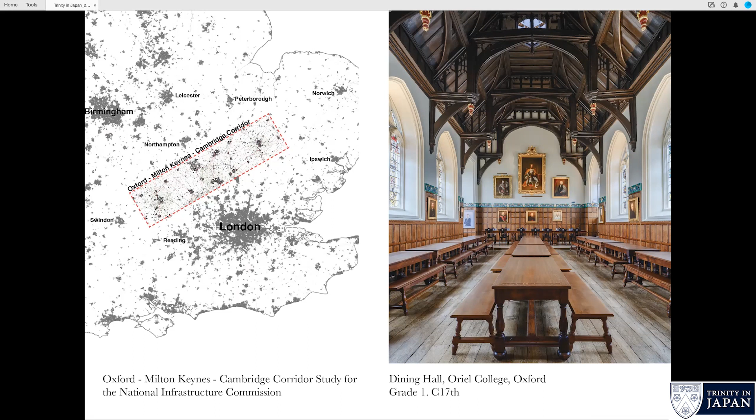The impetus for making existing buildings sustainable is simply this now hackneyed, well-familiar argument that buildings consume about 45% of our energy. 85% of today's buildings are going to be there in 2050, at which point we're going to be ostensibly at net zero - we've got a legal commitment in the UK to be there. All existing buildings are going to need a major retrofit in order to live within the amount of energy that's going to be available in a net zero 2050.

And such is the intensity of conservation concern in central Cambridge that it would be enormously difficult to get permission to knock one of those down and replace it with a modern building. So Trinity has very limited options for new build, and therefore needed to make the most sustainable use of their existing buildings. At the same time, they can't all become museums - they have to have an ongoing economic and viable use.

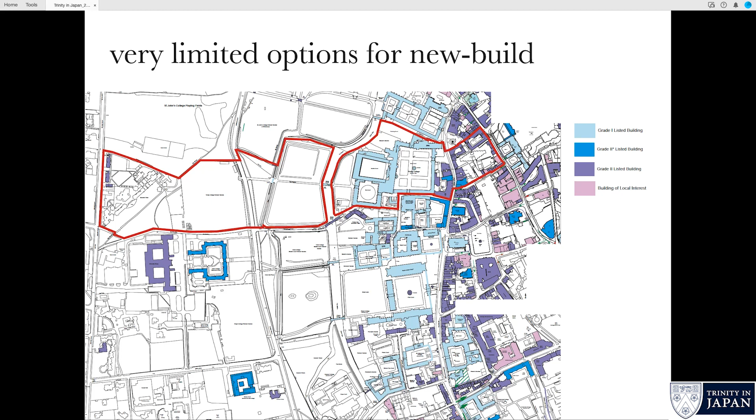A bit more context: the National Grid publishes future energy scenarios every 2 years. The first time these came out, I was looking at a figure that said there's 177 terawatt hours of energy available for housing, including residential buildings. There are four different scenarios - do nothing, and really ambitious. But you take 177 terawatt hours and divide it by the square meterage of all the houses and residential buildings in the UK, and you find a number that's not much bigger than the passive house level of energy use. So there is actually a supply side constraint on the energy available to our buildings in 2050.

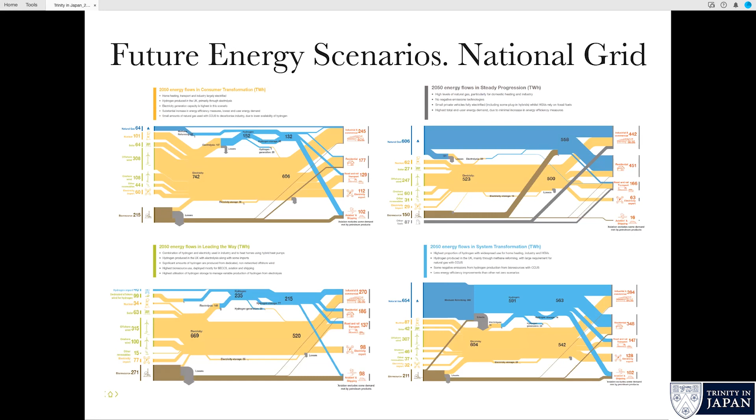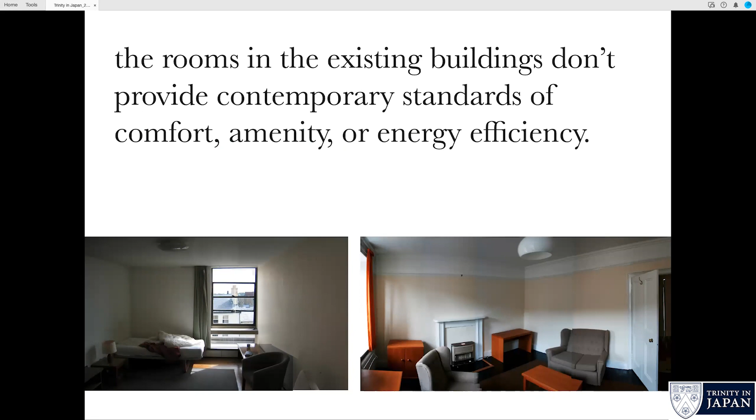There's a much longer calculation behind that, but I have published it and can send it if anyone's interested. The rooms in Trinity, whether in the Wolfson building on the left or New Court on the right, were no longer really providing contemporary standards of comfort and amenity, and certainly not of energy efficiency. So the bursar, Paul Simm, who was the junior bursar at the time, asked us to look at the Wolfson building. Sorry, I'm going to step back a bit.

The constraints on retrofit are listing and the approach of heritage agencies, the constraints on decanting whole populations of students from buildings while you retrofit them, the constraints of the college calendar and exam terms, and in Trinity's case, the fact that you suddenly discover you've got a whole of New Court occupied by builders, and you suddenly discover there's a royal visitor coming, and everything has to stop.

Absolutely everything cleared up - no contractors on site, the whole thing dressed up as if nothing was happening. And the final constraint is the lack of experience in the construction industry and the way in which we are not teaching people our building trades to work with historic materials and techniques.

Paul Simm, the junior bursar, asked us to look at the Wolfson building, built by Architects Co-Partnership in 1972. It was the first building I ever studied with my supervisor, David Roberts, in the first week of the first year. He said, 'What do you make of this then?'

It's a pretty classic brutalist building, with a kind of tectonic architecture of stacked and stepped blocks. It's pretty unyielding. That's the view on the left from Sidney Street, and on the right from the raised plinth, which sits on top of Sainsbury's at the Sidney Street end and Heffer's at the Trinity Street end.

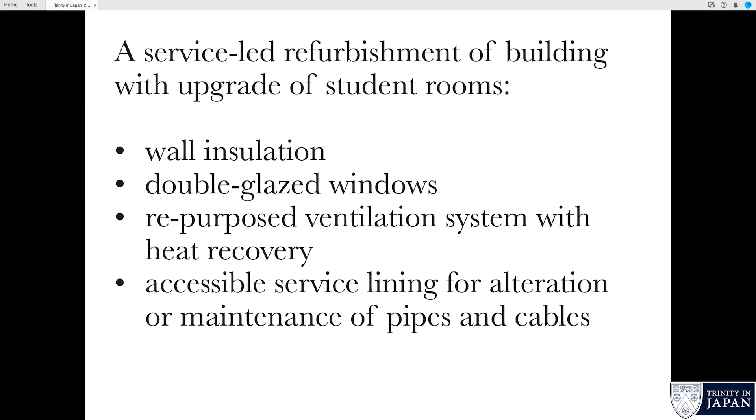We installed double glazed windows. We repurposed the original kitchen extract ventilation system to provide MVHR, to provide tempered fresh air to every room, and extract it through the gyps and the bathrooms and shower rooms and so on. And we built this accessible service lining for alteration or maintenance of pipes and cables and stuff.

And this is a completed room. We couldn't persuade the college to lift up the floor and put in underfloor heating, but we have got a much smaller radiator to adequately heat the room, and we've improved the insulation of the walls and windows. My understanding is students are very happy.

I tried to get the college to do some research. There's some research done at the Danish Technical Institute that says if you give people really good air quality, they perform much better, and there's evidence of that research done in schools. I asked Trinity whether they were prepared to look at the gradings first-year undergraduates achieved and whether it had changed after they moved into the building, but the college weren't prepared to do that, and probably quite rightly.

On the roof, we achieved a first in central Cambridge, which is covering the roof with photovoltaic cells. They deliver an output which matches the energy required to run the MVHR system, so those things are a kind of self-sustaining system without a major draw on the college's electricity supply.

Oliver, can I interrupt here at this point? By all means, yes, please, anyone interrupt. Sorry about this, Dennis sent a message here - he wanted to ask about the photovoltaics on top of King's College Chapel. What do you think about it? So I thought rather than waiting to the end, it would fit here, I think.

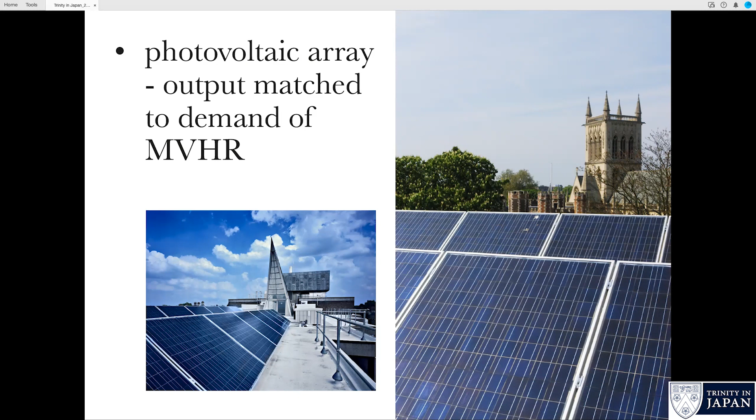So what we did internally, and I don't know how many of you remember the Wolfson building, but it was a pretty dark, foreboding interior. So we've replaced all the heavy glazing around the staircases and put in fire-rated clear glass, and the college insisted on a kind of colour coding of the floors, because that's the other aspect of that building, is you couldn't really work out where you were until you got to the top.

And then in the underbelly of that kind of stepped ziggurat form, we hung a couple of rooms, which were sort of free space, really. They increase the kind of social space component of the buildings, but they also form teaching rooms. Talking to teaching fellows there, they say, well, every other room in the college is a room with a wall and a window aperture in it. What's fantastic about the rooms, they're called the hanging rooms, is you're just there in the landscape. You're there in the architectural courtyard.

Some issues with glass floors, but I really like them, and I think people have learned to love them. So that's the view from the Garden of Eden, from Whewell's Court, with this crystalline glass room, and that's the view underneath it, with a flat black glass soffit. These were really just an extra, and to the college's enormous credit, when we came up with the idea, they just said, yeah, we love it, do it.

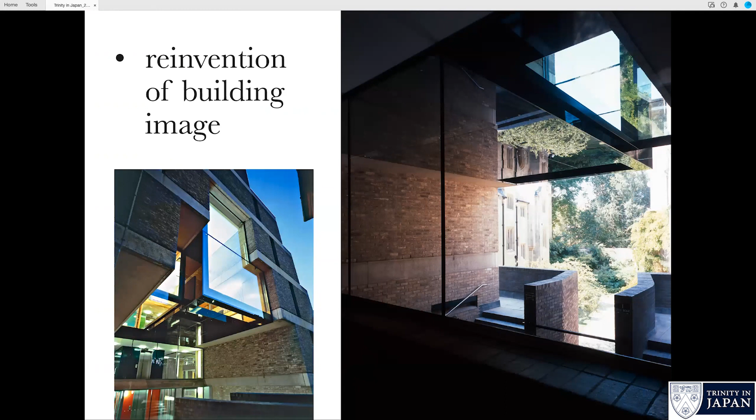So that's the view from Whewell's Court, and that's the view from Blue Boar Court at the back. Partly what these things do is reinvent the image of the building as well. So whilst you've upgraded the level of comfort and amenity in the building, at the same time you're giving the image a bit of a makeover, and I think making it more popular.

Moving on then to William Wilkins, 1822, New Court, commissioned when Wordsworth's brother, the poet Wordsworth's brother, was the master. Trinity was at that stage not a very wealthy college. It's rumoured that William Wilkins himself paid for the stonework on the river elevation - a precedent I was very keen not to follow.

He originally designed it as a Greco-Palladian building in response to the Wren Library next door, and then lost his nerve halfway through, or the college lost its nerve halfway through, and it was recast as a neo-Gothic building. When we took the plaster off the inside of the river elevation, we found the stones in place in the walls to form the much larger rectangular windows, so it's obviously a change that happened while it was on site.

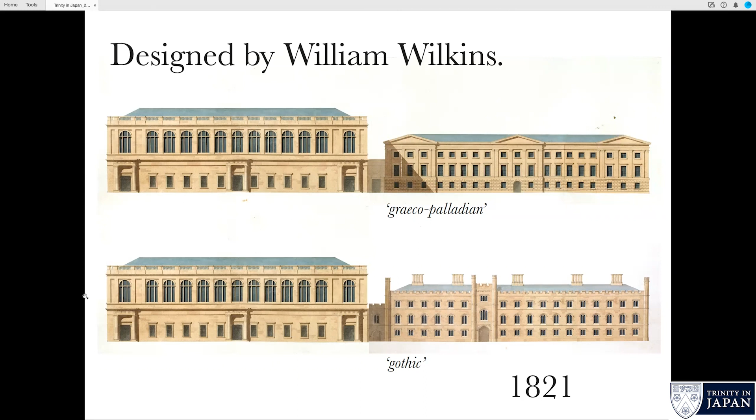The river elevation was clad in stone, but all of the other elevations, except for Garret Hostel Lane, were finished in a Roman render, which was then a relatively innovative material from one quarry in Kent. It's a natural render product, but its natural color is quite dark pinkish gray. So the building was finished with a lime wash, which was a lovely ochre color.

The other things to note are that originally the windows were leaded lights in metal frames. The window tracery is cast iron, and again that was quite innovative at the time. The chimney pots, some of which had already come down, were also cast iron in the original design. Everything was treated, as far as we can tell, in a kind of warm ochre color, and then the windows were just painted black.

But by 2010, when the college asked us to look at the building, the stone elevations were in pretty good shape, but some of the gutters and downpipes had split, so there were issues of leaking. In the 1970s, the building had been re-rendered in Portland cement render, and they had very carefully color matched it to the now bare Roman render. So the courtyard, when you all knew it, would have been this pretty dingy, dark grayish pink color.

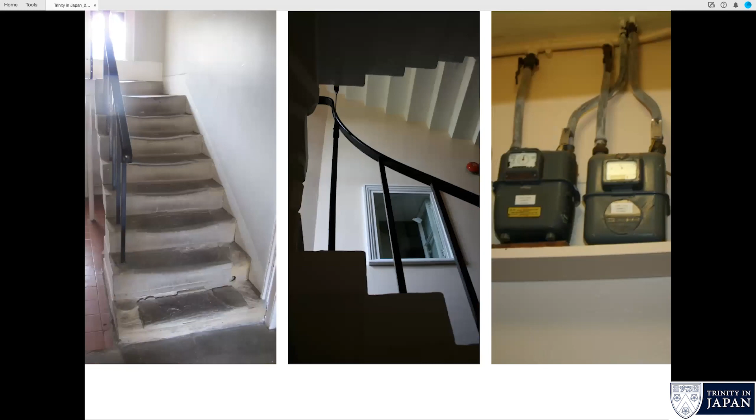The stone stairs, very heavily eroded, largely I think by bedders mopping rather than footfall. The kitchens opened directly onto the staircases with no fire separation, and there was still a fully operational gas installation through the building. As the college had iteratively responded to the needs for increased facilities and amenities, loos and kitchens and showers had basically been stuffed into every available corner and under every stair, on top of the stairs.

It was in a bit of a state, and the fire officers weren't very happy.

So the college brief was to create 21st century accommodation within the listed interiors, comply with all the building and fire and other regulations, provide complete new and adaptable service installations, renew the facades and the character of the court and the character of the rooms, and reduce energy use and carbon emissions in line with global targets, i.e. an eighth of where we started from.

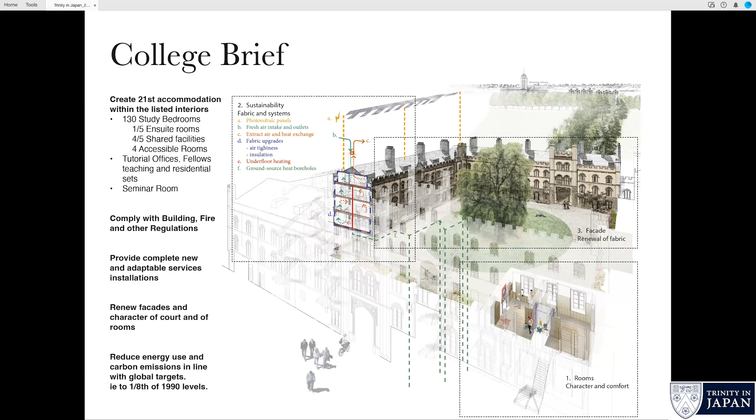At the early building committee meetings, there was a conversation about, should we just demolish it? Is it going to be possible? Should we just demolish it? And the answer is, well, how long do you want it to take? Because it might take 180 years to get planning consent.

The other option, which we proposed, was to retrofit it with a 3-stage reduction of emissions. And this has become a very simple mantra, but it really works, because if you say we're going to reduce energy use to 12.5% of what it was before, people go, oh, it's impossible, it's too big a jump, we can't do it.

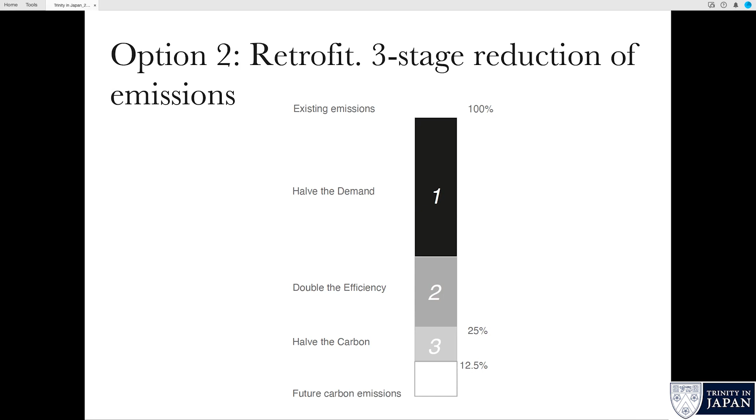So what we said was, we're going to halve the demand - halve the energy loss of the building by insulation and air tightness. We're going to double the efficiency of the plant, the ventilation, heating, lighting plant that meets that demand. And then we're going to halve the carbon in the energy supply to that plant by using renewable supplies. So that half and half gets you to an eighth, in more digestible steps.

So the holistic proposal we came up with, and this was before we'd been to talk to the planners or the conservation officers or Historic England, was: we're going to make the building airtight, we're going to insulate it including double or triple glazing, we're going to introduce mechanical ventilation with heat recovery, which is these dotted lines, and we're going to use the chimneys and the fireplaces as a way of delivering that ventilation, so you don't have ductwork passing through these listed interiors.

And we're going to reduce the energy loss to the point that we can use underfloor heating, low temperature underfloor heating, to heat the rooms, and that will be powered ultimately with a ground source heat pump array. And then we're going to put photovoltaics on the south-facing slopes of the roof.

Now, the underfloor heating's in. The college haven't yet installed the ground source heat pumps - I think that's a question of time and a degree of disruption fatigue. And the photovoltaics haven't yet gone on, but the consent is there.

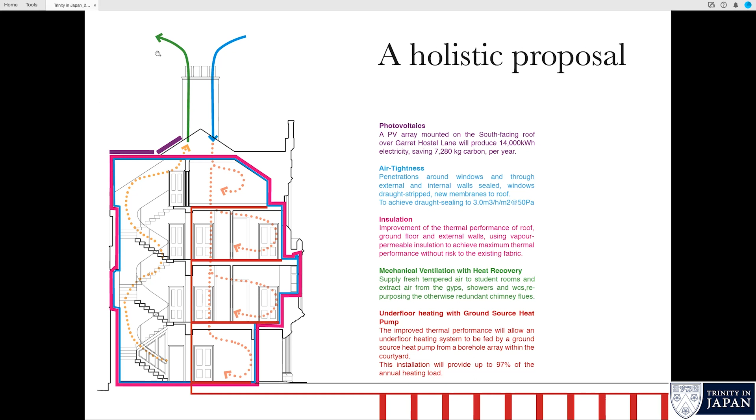So how we went about this, given that no one had ever done this level of intervention to a listed building, was to just sit down with the junior bursar and say, okay, so what are the risks we're facing? One is about fabric and insulating - we're obviously not going to insulate outside the listed elevations, we're going to insulate inside the building. There was a lot of myths about whether you could do that to a solid wall building or not. There was clearly a risk, and the college were very clear - they cared more about these risks than Historic England or the conservation officers.

The building was 180 years old. They wanted it to last for at least another 180 years, and they didn't want to do anything that was going to damage it, either its fabric or its character and its heritage significance. But the third real risk was the whole building consent process - how you get consent for something like this in the context of no one having done it before. So we did a lot of desktop review - this was the relevant research into retrofitting historic buildings and designing for future climate.

Some of it academic papers. There's a guy called Joseph Little in Dublin, writing some pretty horrific research on the growth of mold in internally insulated buildings. I think he overstated the case, and we had to do our own parallel research to show that it was wrong. And there was this amazing tool, which is still available online.

So as I said before, there were absolutely no precedents for this kind of work, but there were lots of myths. One of them, the primary one that Historic England and the conservation officer were saying, is well, you can't internally insulate solid walls. You just can't do it. It's too risky. You will get dry rot. So we set about understanding the fabric performance of the existing building.

There were six kinds of measurements we took: in situ U value, hygrothermal gradient monitoring, thermal imaging, air pressure testing. We built an on-site weather station, because there isn't one in Cambridge that works fully, but Trinity put one on the roof of the Wolfson building.

All of the international hygrothermal modeling tools are based on modern materials. And we say, look, this building was built 180 years ago on a shoestring. The bricks will have been cheap bricks, and they will have used the best bricks from each batch out of the kiln on the outside faces, and on the inside it will be any old rubbish and rubble. So that's not going to behave like a contemporary standard brick of known conformity of dimension and thermal and vapor transport properties. So we need to measure the actual building rather than rely on any of the online tools or assessment methods.

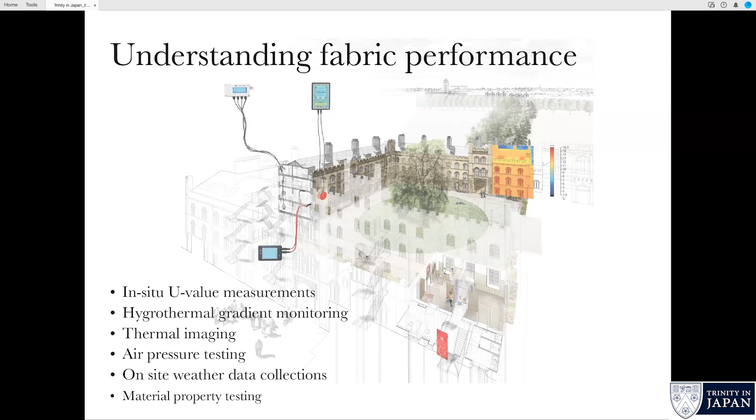So this is testing air tightness and thermal imaging. You can see radiators through walls on Garret Hostel Lane Bridge, such as the thermal performance of that wall. There were a lot of leaks.

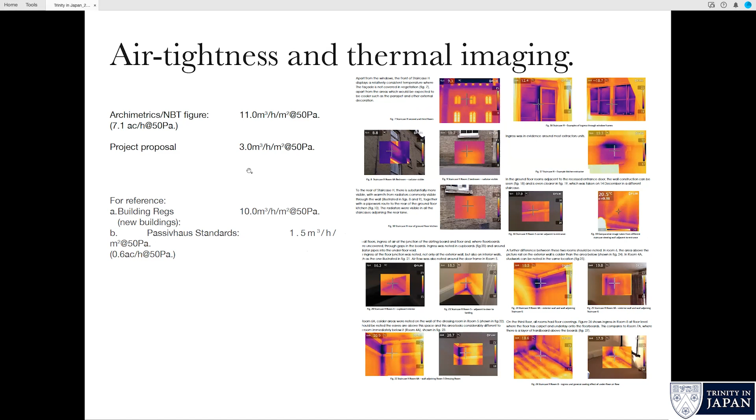The accepted wisdom was you'd have a figure of about 19 meter cubed per meter squared per hour at 50. We got 11, so it wasn't as bad as the SAP analysis or other things would predict. We wanted to get to 3, which was better than building regs, but not as good as Passive House.

The in situ U values were a really critical thing, because actually all those irregularities in the thickness of a wall add to its thermal performance. A standard U value calculation of a wall using BuildDesk or a proprietary tool suggested these walls would have a U value of about 0.94. What we actually measured was between 0.59 and 0.78, with an average of 0.69. So that's a 25% difference.

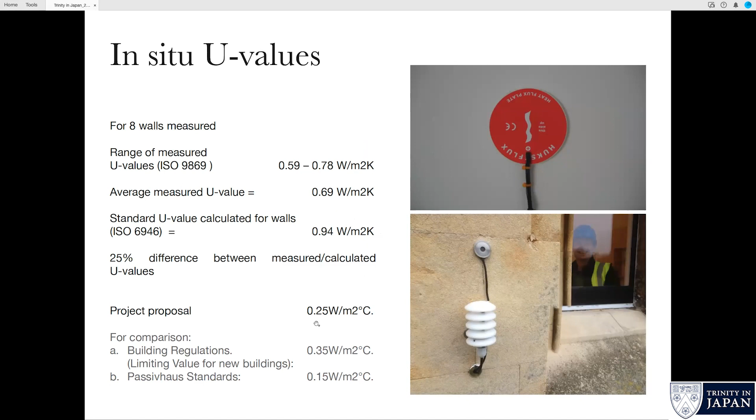What that does is save you from the risk of over insulating in order to reach a target, and therefore causing yourself problems of mold, condensation buildup and mold growth. So we aimed for about 0.25, which is better than building regs, but again, not as good as Passive House.

The interstitial hygrothermal monitoring - that's where you put probes in the wall at different depths, and you measure the temperature at the top, the humidity at the bottom, at various points through the wall. If those two lines cross, you get dew point, you get interstitial condensation. So the wall was working pretty well beforehand.

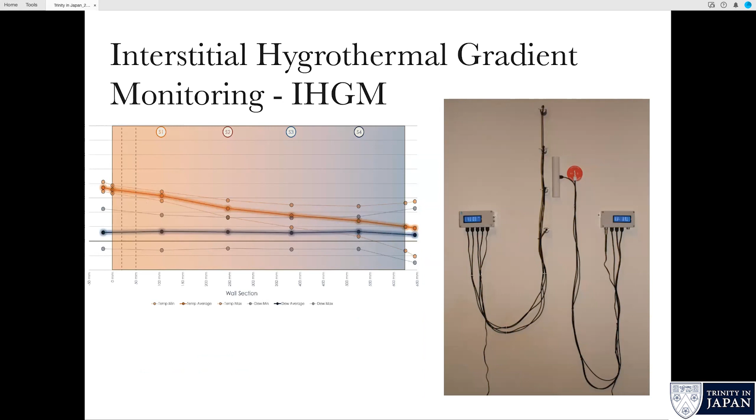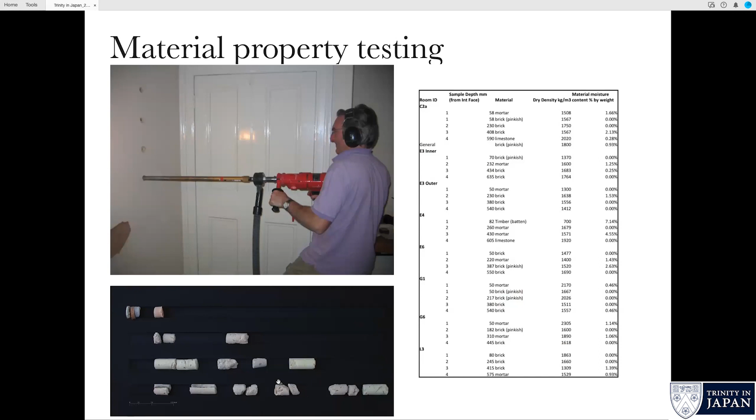It was quite an intrusive process, but what you find when you take a core sample out of the wall is there are lots of gaps, and those gaps actually help your thermal performance.

The Heritage Agency said, yeah, but look, you're just talking about models - what they don't mean anything. So the college decided they would build a sample wall of the insulation proposed. On the right in this room, I6, is a sample installation and a control installation, to see whether putting insulation on really was going to cause a breakdown of the fabric. We ran this for a year, and that's the control test - oh, the word July has dropped off my slide, sorry.

Basically what it shows is that in the insulation zone there is a steeper thermal gradient and a slightly steeper moisture gradient, but the lines don't cross at any point. The conditions in the wall outside the insulation are more stable than in the control situation. We still don't know yet whether that's a good thing, and only time will tell, but all of one's instincts are that stability is good for built fabric.

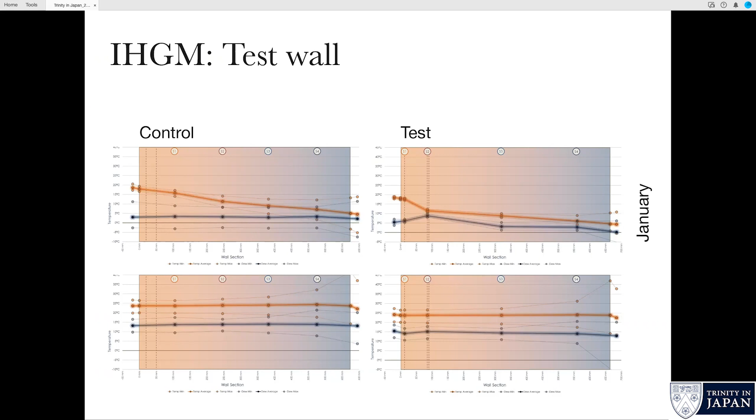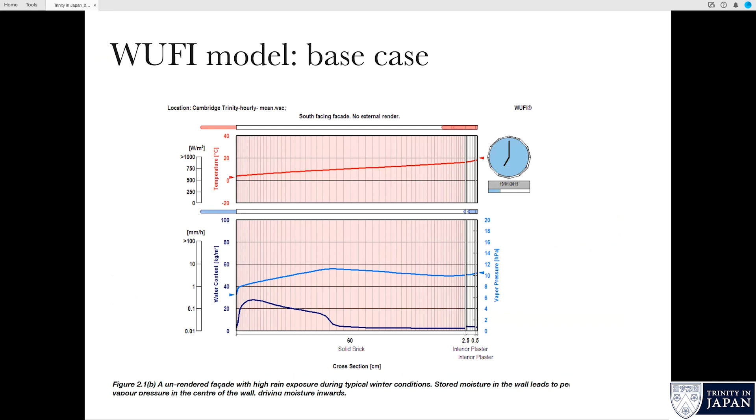The college set up a technical scrutiny committee of fellows, and all of this stuff had to be presented to them on a regular basis. They said, yeah, we agree with that research, we think that's a reasonable assumption to make, or a reasonable inference to draw from the data. That was brilliant, because having the college with us at every step made us feel much more confident, but it also fed back into the college's confidence in what we were proposing.

But I found this completely meaningless. Is 80% a good thing, or is 44% a good thing? Is it good enough? So we went back to basics and said, what is the risk we're talking about here? It's the risk that you create conditions for mold growth.

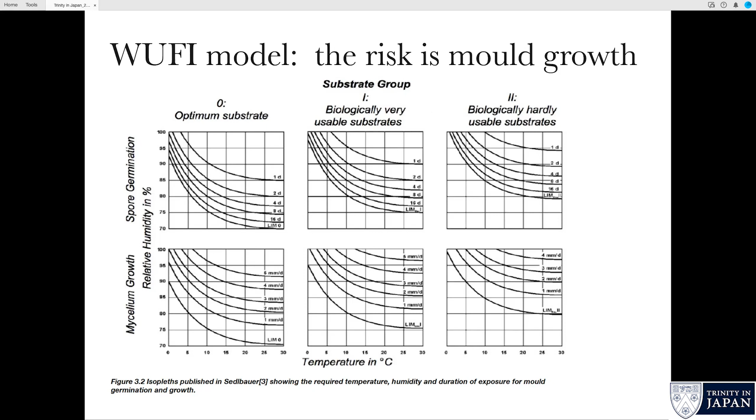So here are some isopleths of mold growth. On the left, optimum substrate, that's agar jelly - that's O-level biology, agar jelly, mold growing. Biologically very usable substrates, that's things like building paper and modern softwood. And on the right, hardly usable substrates, that's actually things like 180-year-old pitch pine floor joists, concrete, and brick.

We said, let's measure our risk, our output from our WUFI model, against that. So on the left-hand side here, if you did what the industry was saying we should do, which is to use a phenolic foam insulation with a vapor control layer, you find that over 30 years' worth of model conditions, you're growing a lot of mold.

On an exposed elevation, so that's a south-facing elevation, you're growing a lot of mold - where there's not much rainfall, and moisture is moving through the walls from the outside to the inside, as well as being generated by users, showers, kettles, and stuff internally.

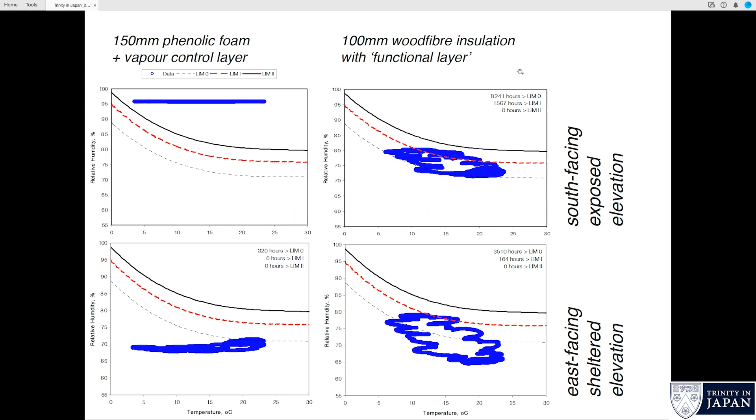So if you build a complete imperforate barrier, which is in itself almost impossible to do on site, you will have problems on some elevations and maybe not on others. If you use wood fiber insulation, which is vapor permeable, allowing moisture from the inside to move outside and vice versa, then you have a broader range of conditions, but as long as they don't cross that red line, you're probably going to be okay. It turned out 100 mil was too much for New Court, so we used 60. But I'll come on to that.

So another myth is, oh, if you're going to insulate inside a building, you've got to insulate the party walls that meet the outside wall, because they will be cold bridges. Well, we did a lot of thermal analysis, and we found that's rubbish. You create cool bridges, but they're not cold. And as long as those cool bridges are greater than about 13 degrees, you're not going to get condensation. These are the walls at New Court.

We were modeling the coldest point being 16.8 degrees.

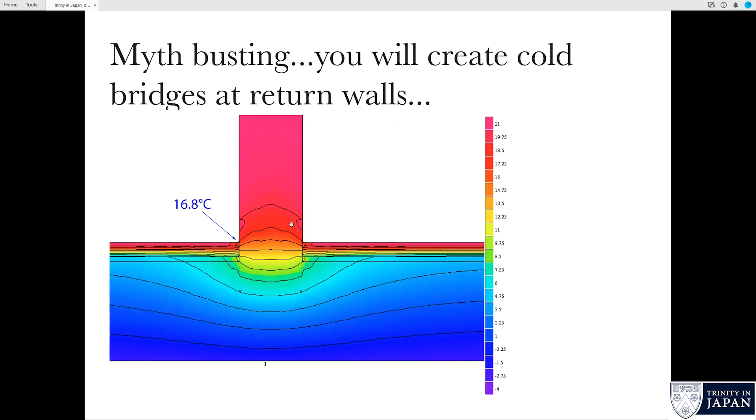So actually comfortable. And if you expose a cornice - the college again brilliantly said, we don't want to do that thing where you put insulation on the wall and you've taken the cornices off and put them back on the face of the insulation. We want to leave them where they are, and reveal them to show what we've done, to manifest that we've laid this panel of insulation onto these walls.

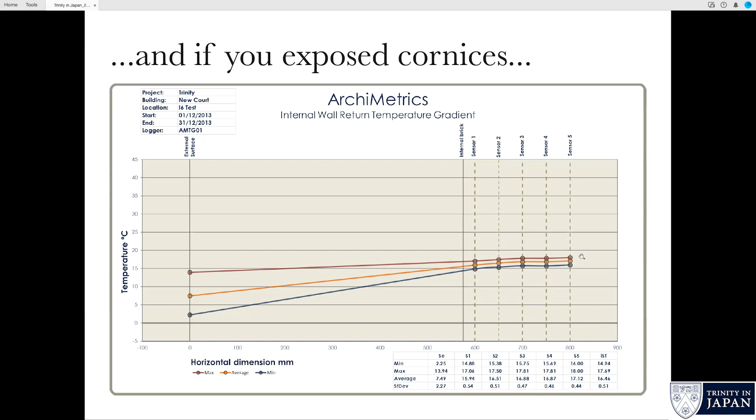That caused a huge kind of, oh, there'll be mold all over them. But actually, the predictive modeling showed that wasn't going to happen. This is actual monitoring on site, showing that there is no conditions for condensation on those existing cornices.

You must say if this is getting too technical, because I could go on about this for hours.

One of the other myths was that you can't put underfloor heating under old boards, that they will crack up and dish and cup. But actually these floorboards were 180 years old. They had already done all the shaking, moving, twisting, cupping and buckling they were going to do. So we lifted the floorboards, put in the underfloor heating, laid the floorboards back where they came from, and they've been absolutely fine.

I don't know what you guys were like at Trinity, but there was a real acknowledgement that students would go away for weekends or longer without telling anybody. So if you're away for more than 48 hours, the absence detector makes a note, and all the heating and electrical supplies are turned down to a base level, so you're not running the room at full energy consumption while there's nobody in there to enjoy it.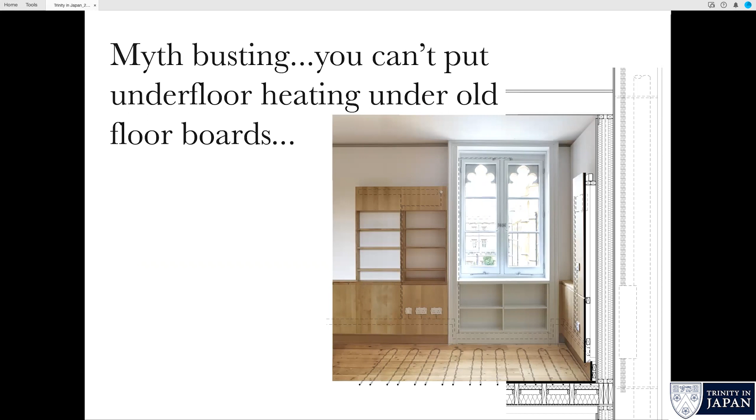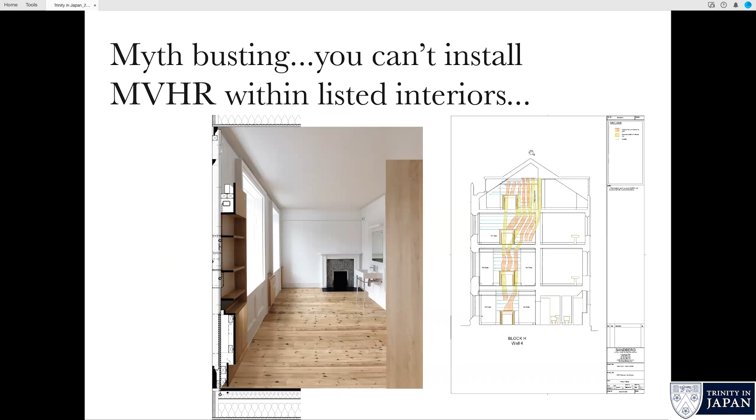When we proposed to use MVHR on the existing chimneys, there was a bit of a rebellion against that, because you can't do that, apparently. We laser surveyed some of the chimney stacks and found they were fine, and actually getting a flue liner down turned out to be much easier than anyone expected.

The plant all sits in the roof. This was the first time we'd ever used Revit, BIM 3D modelling, to make sure it was going to fit and that we could make all the connections.

The builders still didn't believe us that it was going to work, so they built a mock-up in the workshop of how that stuff was actually going to fit and how they were going to be able to get at the filters and do the operating.

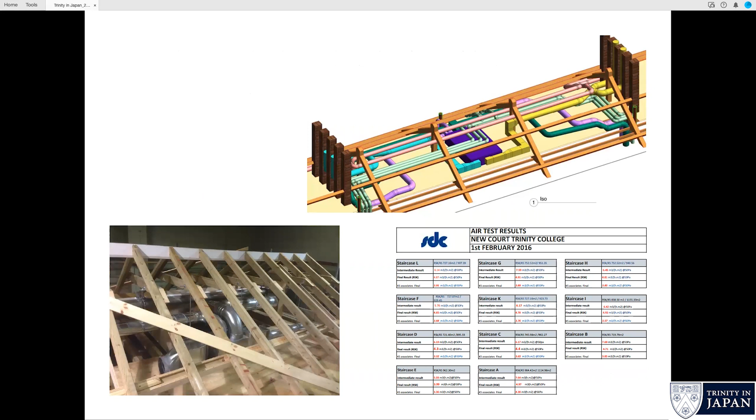So that deals with the technical stuff. But then there was the issue of significance and heritage significance. We started off going through all the normal things one does, so this is a photogrammetric survey of the existing fabric.

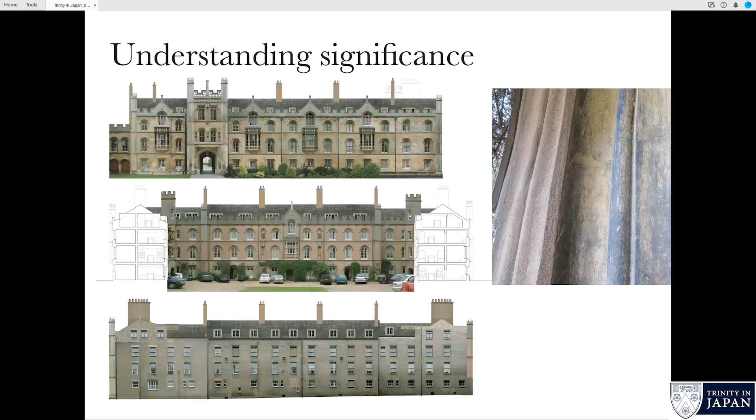We catalogued all of the rooms in terms of their hierarchy of significance, and how many of each kind there were, and logged all of the fabric - you know, have they got original cornices, have they got original fireplaces.

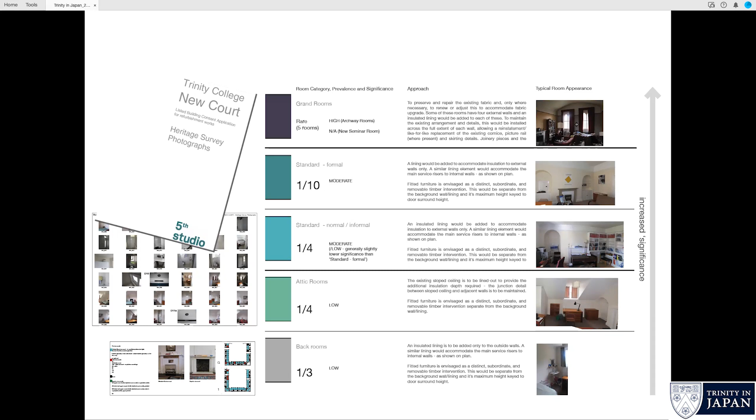And we realized that was playing into the kind of dialogue that Historic England, the conservation officers, normally like. What was actually significant about New Court - this is the photo of B staircase.

So you had Andrew Huxley living at the bottom, and 9 undergraduates and some teachers.

What was amazing about New Court is the way it accommodated each new generation of students with equal generosity, untrammeled by concerns about sensitive fabric. Its robustness and adaptability to each year's generation of new students was actually its most important attribute, in terms of the college and the way it embodied collegiality.

So we said to Historic England: look, this is one staircase, and this is a variety of ways these rooms are used and abused - that's its most significant heritage quality. What we want to do is modify the building in a way that preserves that adaptability and habitability in this very collegial way. Owning that argument and taking it to Historic England was a very important component of getting consent.

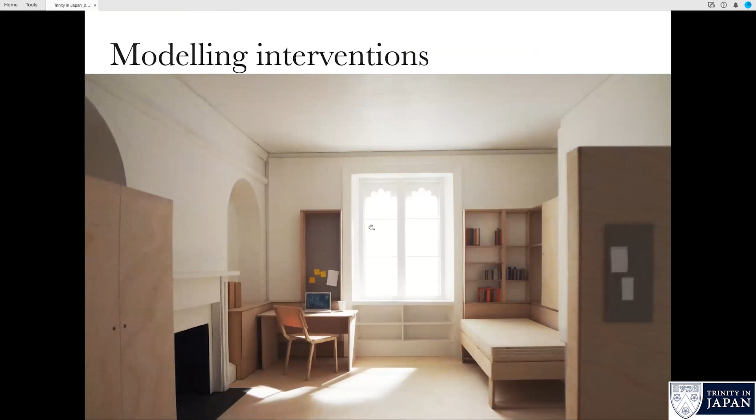We modelled this - a 1:10 model of a room, showing the insulation laid into the external wall, the cornice in its original position running along behind that, and early designs for fitted furniture. We did lots of maquettes and full-size mock-ups of how this was actually going to work, which was brilliant because you could give it to the builder and say, do that.

In the joiners workshop in the brew house, we built a full-size mock-up room, partly for the college's benefit. Originally they said they wanted the same kind of paneling as in the Wolfson building, but that was too bland and neutral. So we came to this form of timber paneling, and the building committee said, we've got all this paneling, why can't it be shelves and cupboards and use it more richly?

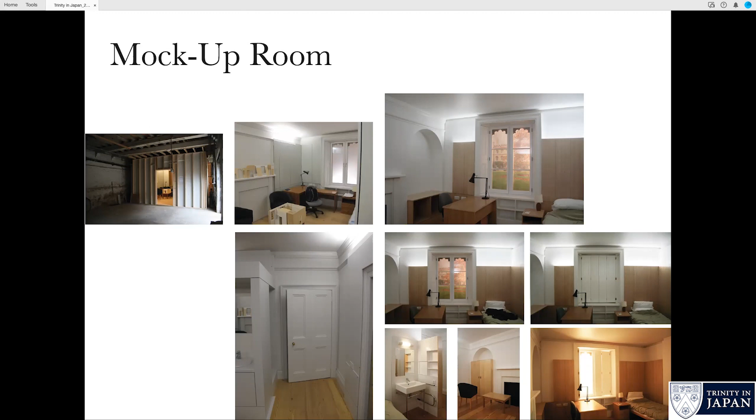Another myth: you can't double glaze historic windows. We had wanted to triple glaze the windows, or replace them with triple glazing, because the windows weren't original. As we could see from that earlier photo, they originally had leaded lights in steel or iron frames. That was a real, very difficult argument. Going back to the proposals being holistic, we explored 15 ways of dealing with the windows, from doing nothing to replacing them with triple glazing or having secondary glazing.

We analysed the contribution that those different options would make to the heat demand, and we found there's a tipping point. If we use more energy than this, the underfloor heating is not going to be viable and the ground source heat pumps won't work effectively. Basically, you can't cherry pick which elements of this project you like or don't like from a heritage perspective. You have to do them all.

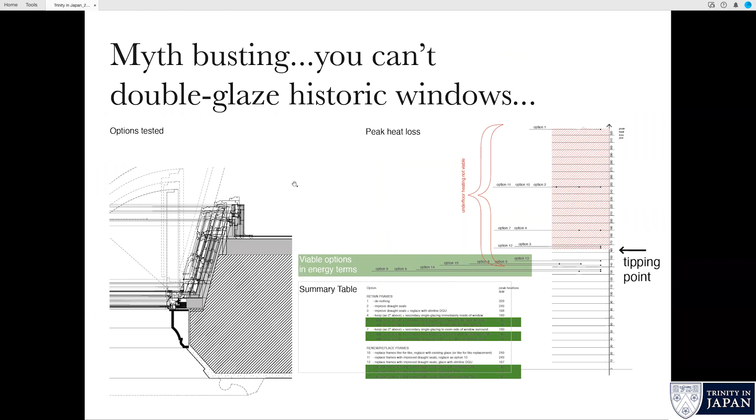We found there was a handful of solutions which did work, and the one we actually proposed was to take the existing timber windows and put slimline double glazing in them.

So the college workmen and joiners made up a complete facsimile of an existing window, and we put double glazed units in it with a kind of ripply outer glass leaf. We installed it and said to the conservation officers in Historic England that one of the ground floor windows in this court had been double glazed. They said, oh, it'll stick out like a sore thumb, it's an alien technology, we'll spot it in seconds. After 10 minutes they came back and said, actually, we can't see it, you haven't done it. You can't tell they're double glazed units from any further than 2 or 3 feet.

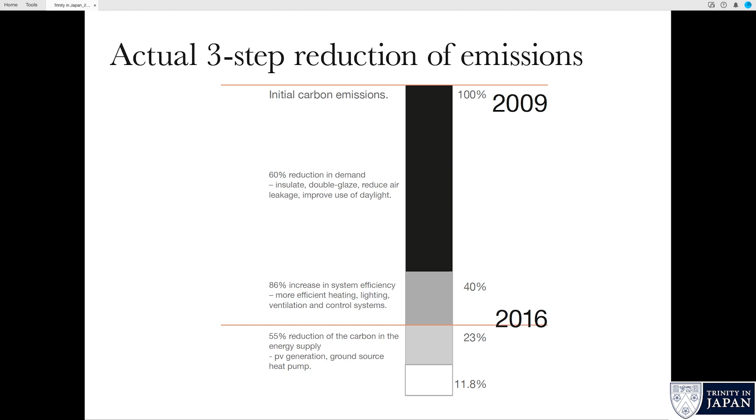Looking at the latest figures from the college, we've overachieved on the reduction of demand, slightly underachieved on the system's efficiency, and we're still waiting for the renewable energy. But we're doing better than we thought we would.

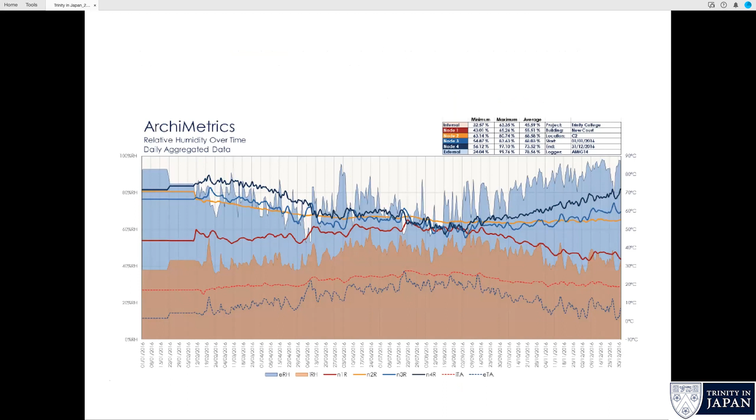In terms of the monitoring, which is still ongoing, the relative humidity in the walls is better than we modeled or predicted, and over nearly 7 years of monitoring, we've had no real incidents.

The conditions in the room—the MVHR is delivering really high quality air with very low levels of carbon dioxide, even when students have parties, which of course they don't. The CO2 level rises, but it's controlled back again within an hour or so.

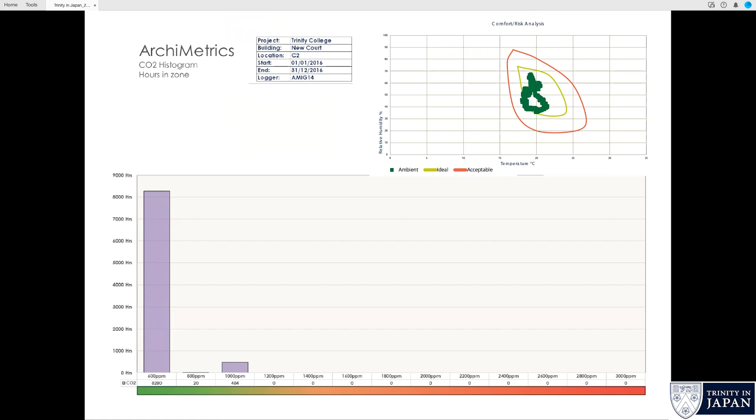We added this question to a college questionnaire, asking students to rate whether they would recommend a student to live in a room in New Court. The junior bursar and I said, if we get 50% yes, that's a result. But actually, we got an 80% result.

There were people complaining about the person in the room above them playing the violin, but that's nothing to do with the building. People will always be unhappy about something, but the idea that you got 80% of people saying yes, it's a room I'd recommend to someone else, was a result.

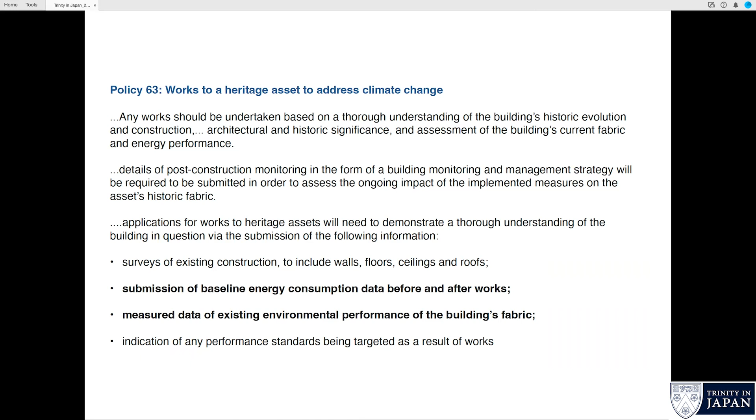The methodology we developed for this has become embodied in local planning policy. So the Cambridge local plan asks anyone who wants to do work to a Grade 1 listed building to go through the same steps as we did—to understand how the building worked before you do anything, and to provide data on the environmental performance of the building fabric, to understand it.

The previous junior bursar said that we've already reached 80% reduction in carbon footprint, and one of the residents said it's the nicest place to live in college. So on those kind of soft metrics, we think it's been a success.

It's won awards. The press are very enthusiastic about it, setting a kind of benchmark for how we must do these things. Nobody has looked at a Grade 1 listed building with this degree of retrofit. So the college is still out there on the leading edge in terms of research and innovation.

Very quickly, some lessons learned: we don't teach people how to deal with the right kind of materials. They don't understand lime. They don't understand that architects are happy for walls not to be plumb and square—historic buildings aren't, so why should new buildings be? New estate housing is.

We need to teach people better. There's a shortage of skilled workers - the people who did the render on the building were Romanian, and they had just been re-rendering the Colosseum in Rome. They are not working in the UK anymore. I'm afraid the combination of pandemic and Brexit has reduced the pool of really skilled workers in the UK.

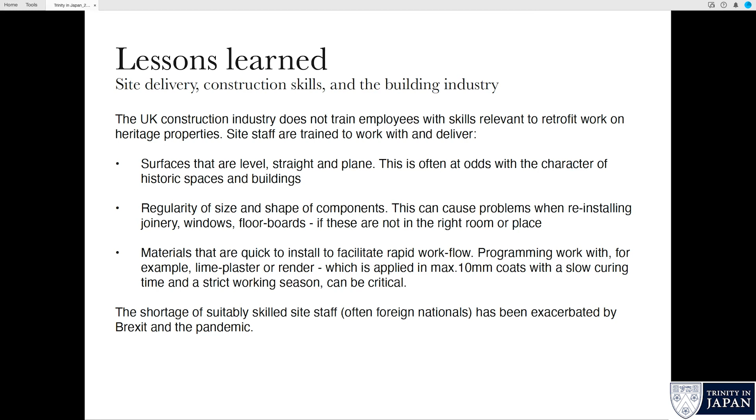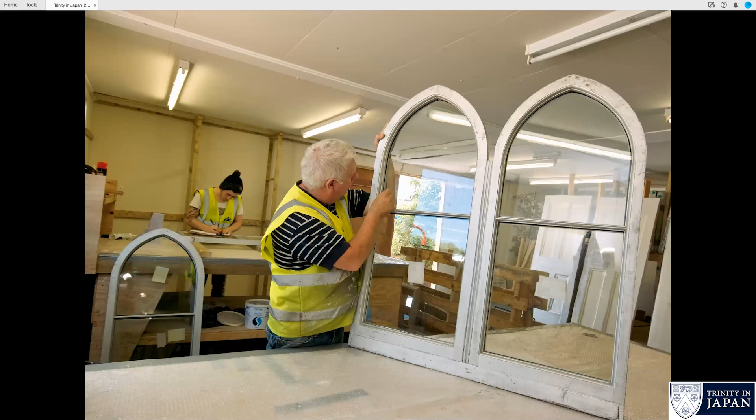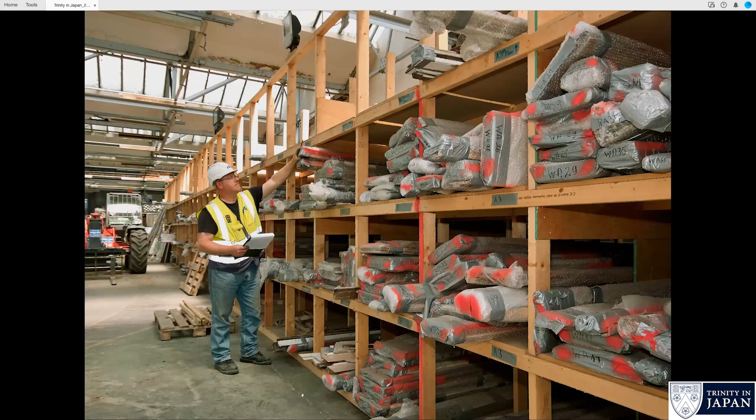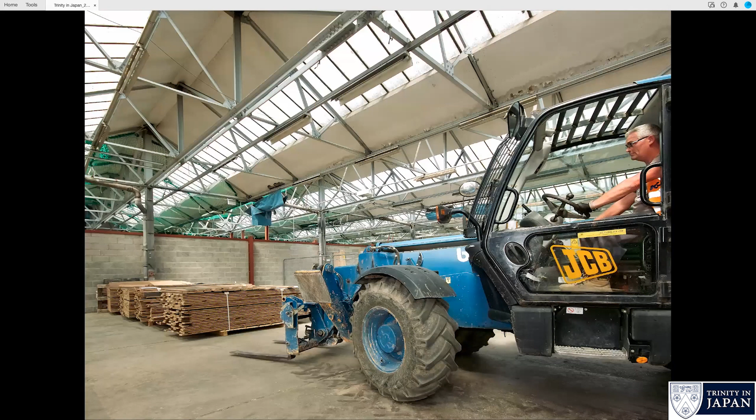This is what we persuaded them to do instead, which was taking the windows off site and reglazing them and repairing them in really comfortable workshop conditions where they could do a really, really good job. This is all the cornices and architraves, again taken off site so they could be dealt with carefully and properly, but carefully labeled so they went back in the right place. These are great pallets of all the floorboards, taken off site to have all the old nails stripped out of them and to have the black painted finish taken off them.

In order to reach the level of quality we wanted, we were on site every day. We didn't want the builder to find things and make up their own minds as to how to get round problems. And although Neil Steen, the college guy, was there all the time too, we were on hand to answer those questions before they became headaches or significant causes of delay.

We had to prohibit the use of power drivers - people going at a screw and over-tightening something and destroying an old cornice or a bit of historic joinery just through enthusiasm. But the contractor also increased their quality control.

They increased the proportion of their site staff who were managing and quality assuring from the normal kind of 7.5% to three times that. So they had a lot of hard hats on site checking quality, and we organized a whole recurrent series of talks about how you use lime plaster, how you use insulation and the linings, because the turnover of staff on a site like that was quite extraordinary. You'd get to a point where you thought everything was going really well and then discover someone wasn't using the right kind of saw because they'd just started and no one had told him.

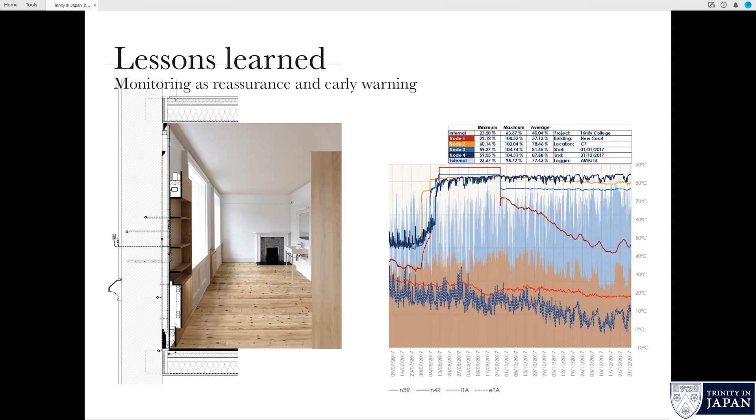I think the other thing we've learned is that the speed at which the electrical grid in the UK is becoming decarbonized has exceeded our expectations. The electricity available on the cheapest tariffs is less than a quarter of the carbon density identified at the beginning of New Court. But as discussed earlier with regard to the national grid, the capacity of the grid to power all electric heating and hot water supply is very limited.

My calculations are that New Court will fit within the limits of energy supply in 2050, and that it sets a benchmark for how we deal with lots of other, if not all, existing and listed buildings.

Okay, hands up - there has been some overheating. For health and safety reasons, opening restrictors were put on all the windows so they wouldn't open more than 100 millimeters, which, given the thickness of those walls, meant they weren't getting much fresh air. So the rooms have overheated, and we have now taken the window restrictors off.

And you know, the overheating is a very small proportion of the conditions in the rooms, and it's obviously largely in the summer when the college doesn't have conferences, so maybe some of the alumni get slightly overheated in the summer, and we have to deal with that.

The behavioural interfaces I talked about - I don't think I would bother to do those again. I think they were quite expensive. I think they added to the complexity of the control system. And with the things brought about by the pandemic, I think the college now have much better ways of knowing who's around and who's not. The students learn pretty quickly that they don't need to open the window to get fresh air - they've got fresh air delivered miraculously into the room, and they haven't felt the need to open the window. So those are things I probably wouldn't do again in subsequent projects, let's put it that way.

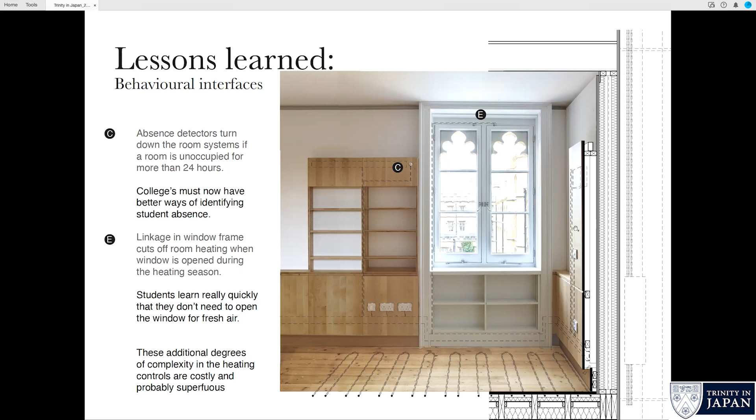If you look at the plan of the building, there's monitoring on each of the southwest and east elevations, on the court side and the external elevation side—12 locations in total, with 12 installations like this. They have full hygrothermal gradient monitoring and in-situ U-value measurement, plus little tags measuring humidity and temperature of bits of old joinery that are still there but covered up. They're all very happy, actually, as we speak. We didn't move the skirtings, we left them, and we put tiny tags where floor joists are built into the wall so we can see if conditions there have changed. Again, what we found is they're more stable than before.

If you don't mind, I'll see if Matthew wants to have some discussion. He's the friend of Alan Babington Smith, who is heading the Trinity in Japan, and he suggested his friend Matthew, who's doing similar restoration work, I think, in Japan. So Matthew, are you here? Matthew? I'll have to see if there's a response.

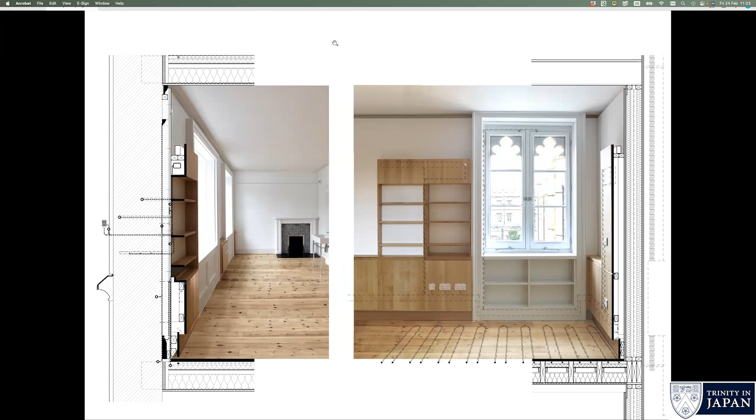It seems to me that it's very nice to have the characteristics of historic buildings justified in this way, that they are actually retrofittable and can be made to work, and it's going to be a huge problem. One can see how a client with the resources that Trinity has been able to take that on board, and that surely is potentially a very useful thing, because you've got an example where you can point at a grade 1 building and what you did. For people with smaller units, maybe a solicitor's office in an 18th century building, the scale is smaller, and what can they do? You can point at this and say, it's doable, and that will give people confidence not to panic and do hideous things to historic buildings. Having had this opportunity to get the information out there, and the way you talked was so lucid, I feel that's something you'd be well equipped to do. It's going to be a very important issue.

I think, looking back on it, that it took us 3 years to get listed building consent. It took us 3 years to work out how to get listed building consent and what we needed to do in order to win the arguments. We're now just on site with a project for Lady Margaret Hall in Oxford, and that process took months because we were able to cut right through it, saying this is what's important, this is how we're going to handle it. You can refer the conservation officers and historic England to this as an example, and they can come and have a look at it. So the subsequent projects have been made much easier because of the research and time that Trinity put into getting this right. It's obvious from what you explained that there's been a huge amount of investment in research and also capacity building and knowledge building, which you can leverage in future projects, of course. Yeah, and fantastic.